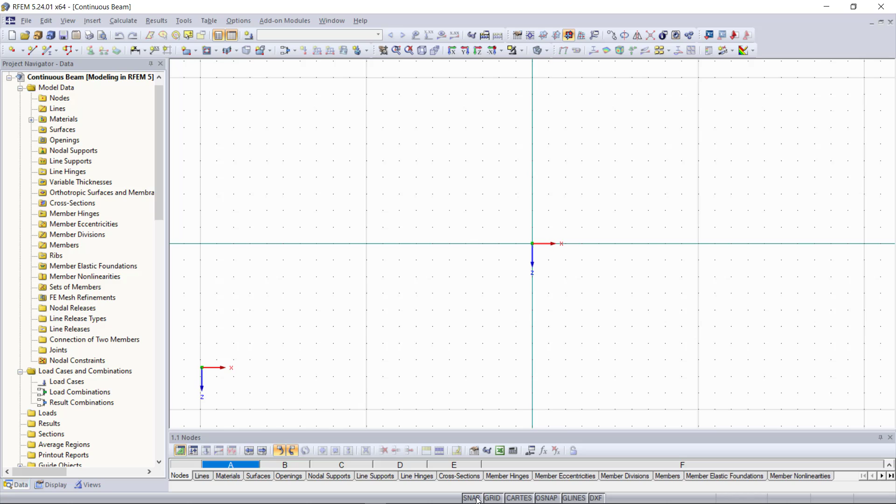So the grid is dividing our graphical user interface into regular sections, and we are able to activate or deactivate the grid down here. Then next to the grid there is the snap option. If we activate the snap, we can snap automatically certain points, like to insert a new node. If we go up here and then say new node, you can see we can snap these grid points, but if the snap isn't activated, it's not that easy to snap a certain point.

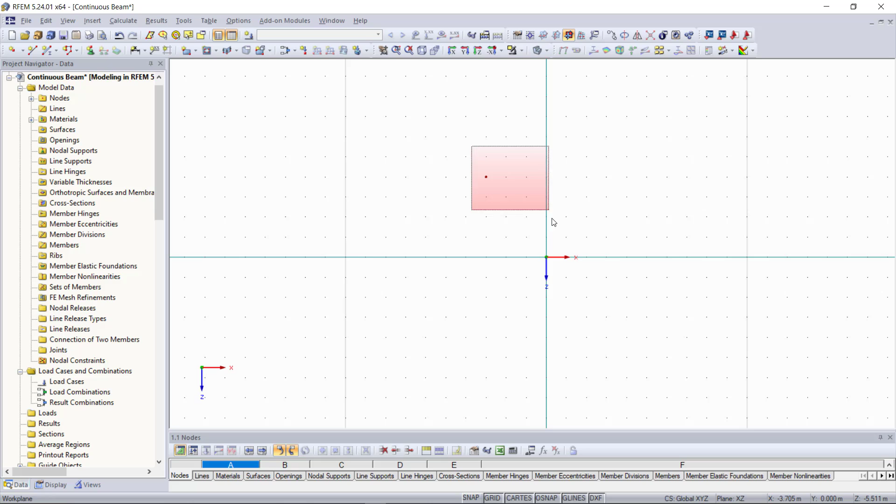And this is also going to be very helpful for us in this clip when we are entering the lengths for the beam element later in the graphical area. Back to the grid, with the right click we can choose edit, and then we can open the grid and snap settings. As you can see, we can activate or deactivate the grid or snap in this dialog as well. Then of course we can choose the type of grid that we want, like Cartesian or polar.

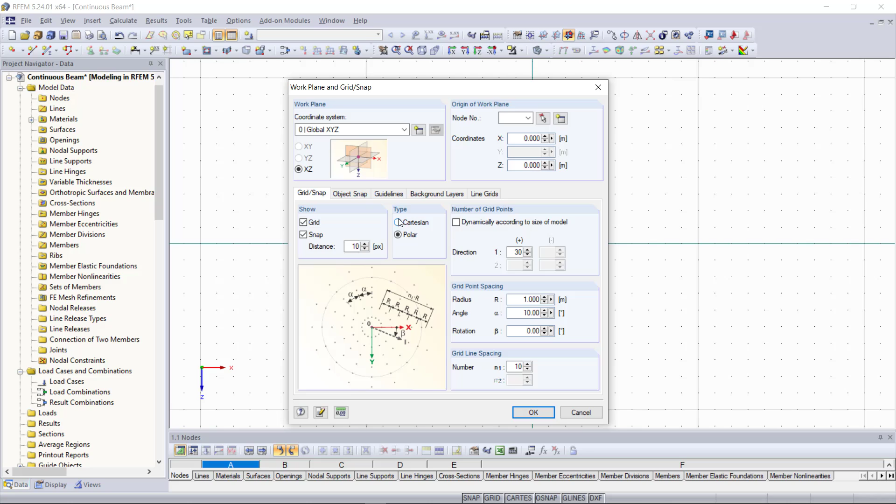Next, there's the option where you can set the number of grid points in each direction. And then we can activate up here the option dynamically according to size of model. This will allow our grid to get adjusted automatically to the size of the model. Down here we can set the space or the distance between those grid points, but we can keep that as 1 meter for our example. Then grid line spacing, we can keep that at 10 as well. And we can click OK.

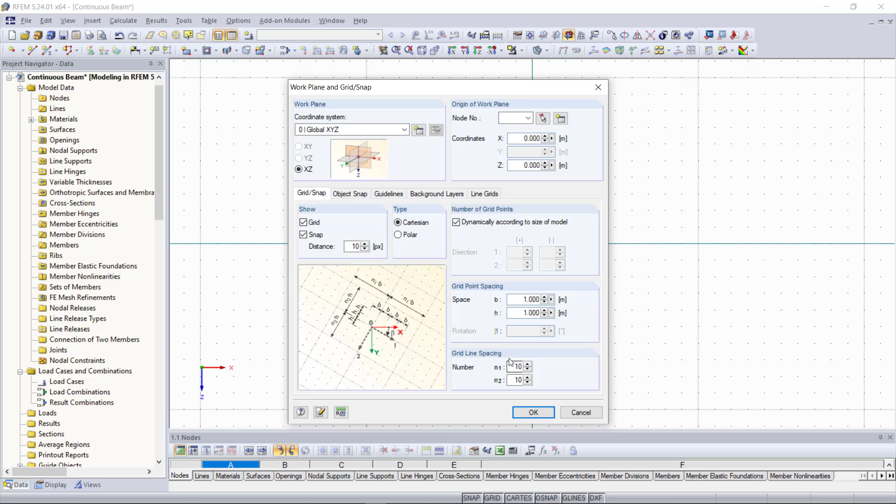So now to get started with modeling our beam, for the direct input of data here in the graphical area, we can do that either up here on insert, and then we can find graphically, or using this toolbar down here where you can find almost everything that you need. During this video we will use this toolbar as it's quicker to access those commands. So unlike the previous two examples where we created in advance the nodes and lines, we are going to create the member directly in this example.

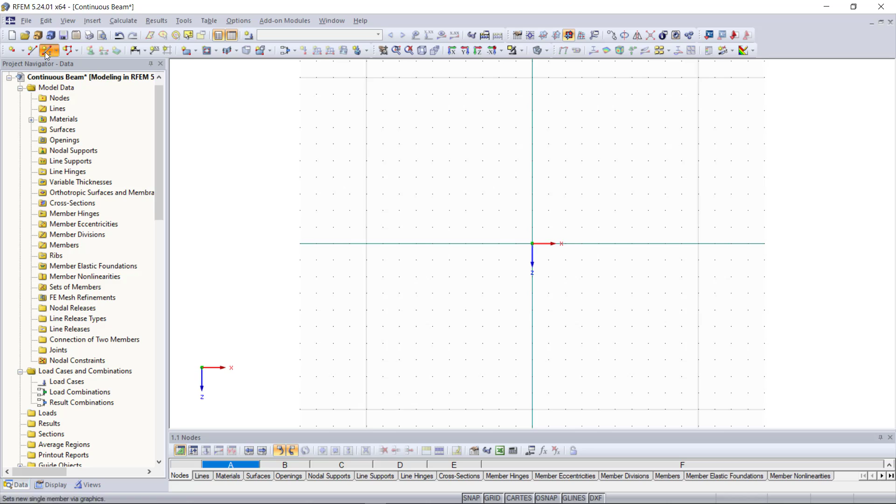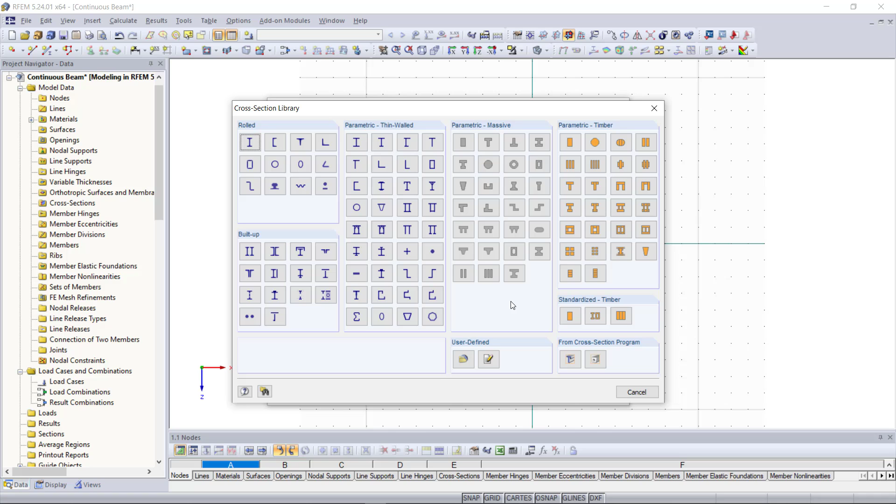For that we go up here and then we can find new single member. We already know this dialog from our last video. Again, all we need to do is to define a cross section and a material, which we can do down here on the cross section. We click this button here called import from cross section library. Then we can set the cross section as we've already done in the last video. Down here we will enter our material properties and then we can click OK.

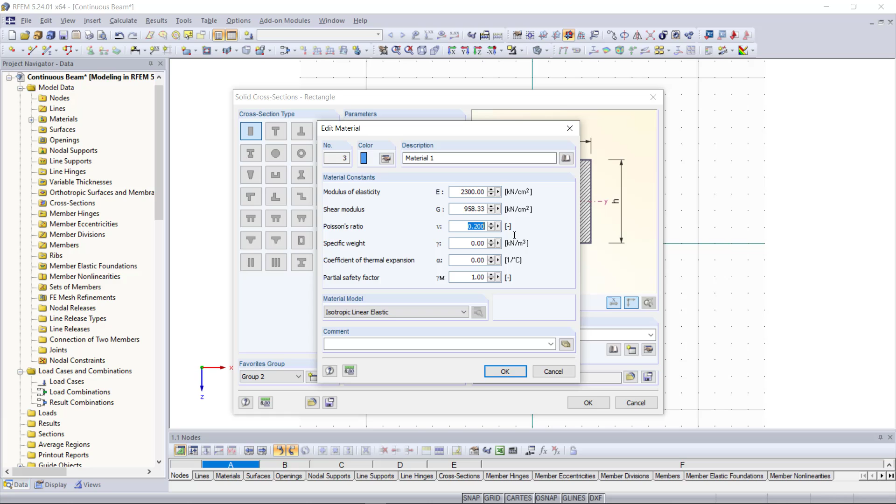Then we can have a look under cross section if everything has been taken over as we'd like to, and then we can click OK once again. So now we can select certain points with a click in the graphical area and define the start and end points of our beam. And since we have activated the snap option, it's very easy to select these points.

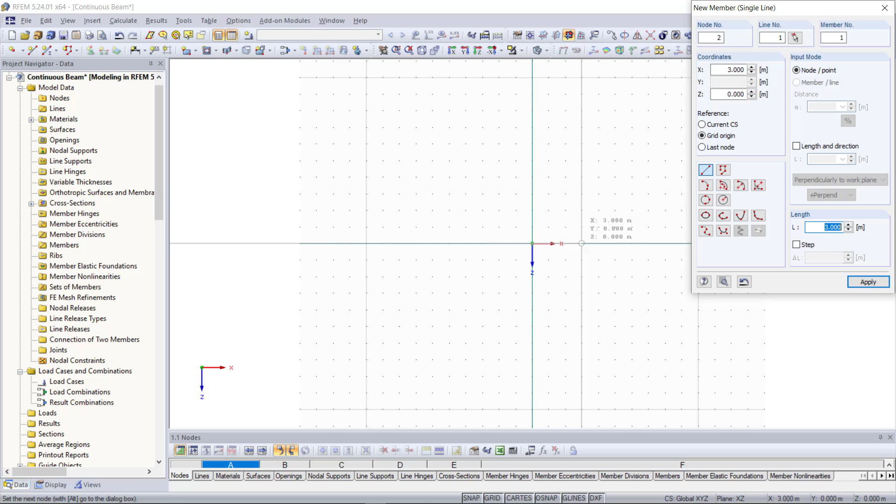So our first point will be again the origin, 0 and 0, and you will notice that the coordinates of the point that we choose appear here, and that's also very useful. Then we can click at this grid point. The second point will be 3 and 0, and the last point will be 6 and 0. With right click we can exit out of this command.

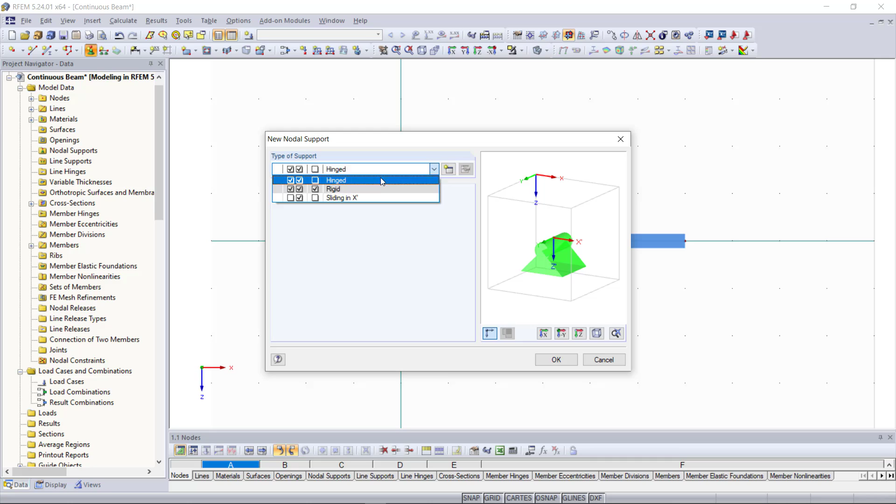Now that our member is created, next we will insert the supports, and again we go up here in the toolbar and choose nodal support. Then in this dialog we can set our support conditions, and the first support will be a hinged one. We click OK, then we can graphically choose the point for that support, and you can see now the support is created. We do exactly the same for the other two nodes, but those will be able to slide along the x-axis, so we choose sliding in x.

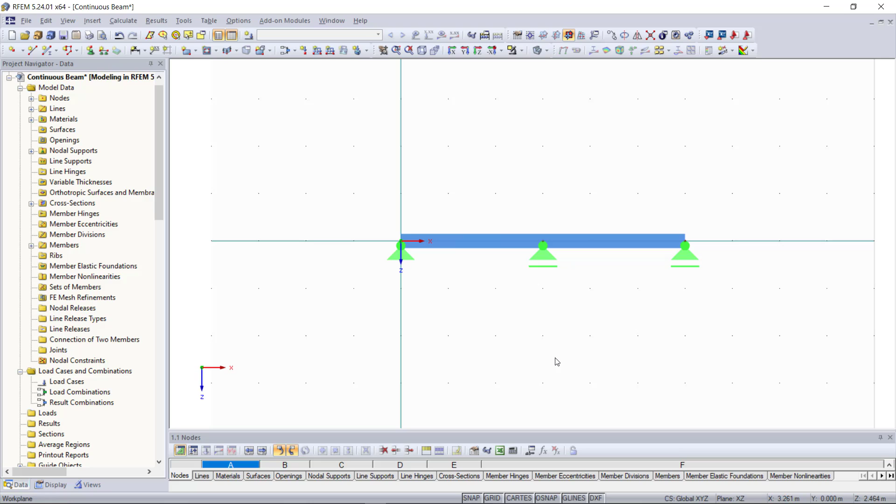The next thing that I want to show you is not really necessary for our example, but it makes the calculation sometimes easier, especially if you have more complex structures. Right now, as you can see, we have a system of two members, the first one here on the left side and the second member on the right side. And we can merge these two members into a set of members. For that, we will select these two members. We can do that with the control key and left click.

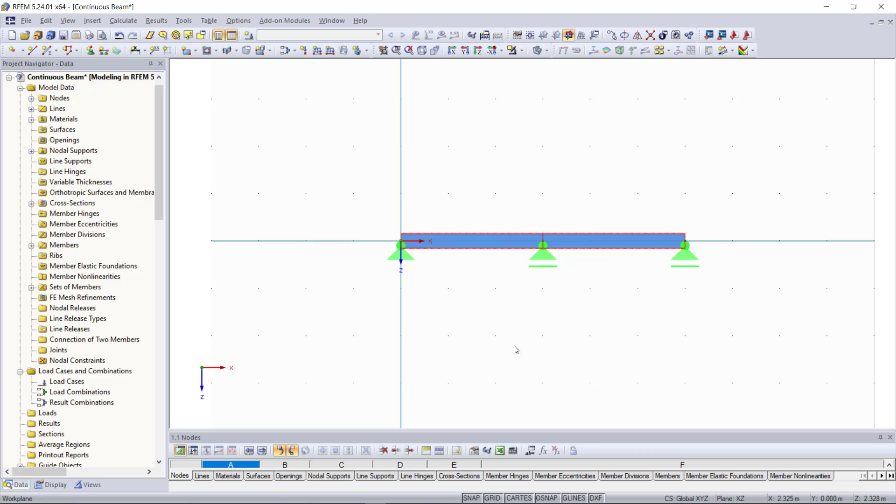And then with right click, we can find create set of members. Here we choose as type continuous members. Since we have them already selected graphically, we can see here that these two members are set automatically in the section. And with OK, we can close this dialog. Now we can see there's a frame around our members, which shows us that these members are now a set of members.

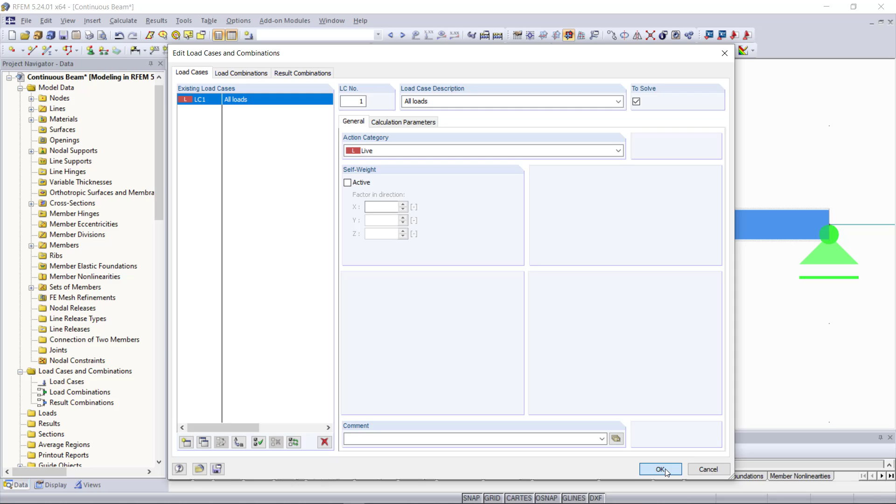What's missing now, of course, are member loads, and for that we can find up here in the toolbar this button called New Member Load. If we click here, the window for load cases appears at first, since we have to define a load case before creating loads. Here we will choose all loads and turn off the self-weight. Next, we can define our load. Here we change reference to from members to sets of members.

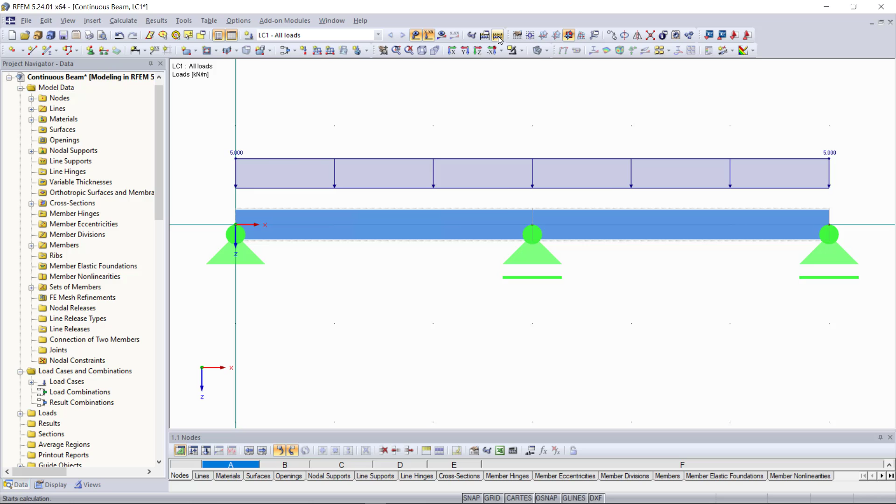As type, we can choose force. As direction, we can keep that in the Z direction. Our load parameter down here will be 5 kilonewtons per meter. And then again, we can assign the load graphically to our members. Now that our system is complete, we can go up here and calculate it. And then we can see our results. We change to the wireframe model, and then our results like deformation and internal forces can be displayed.

So this was our third part of modeling in RFEM 5, and in the next upcoming videos we will learn how to model different types of structures.